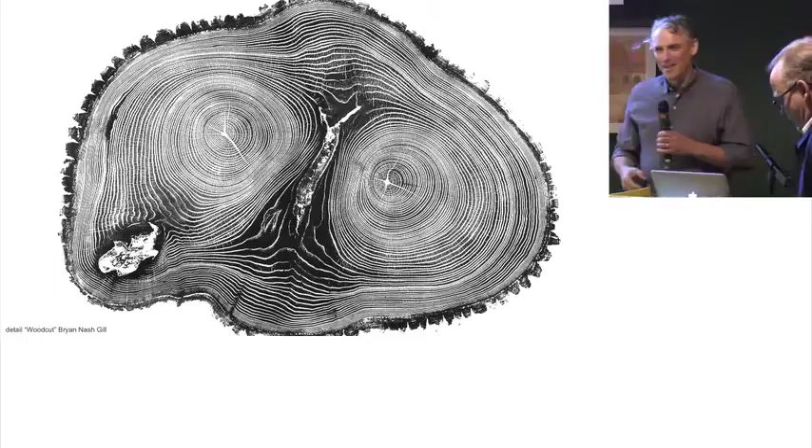Thank you, Pekka. I'm grateful to the Architecture Museum and to the friends that I know here and the new friends I hope to meet, and to Matti, who I've worked with now with Pekka at great length. If I'm either eating the microphone or holding it too far, somebody just wave at me. I'm not used to using 2 hands, I'm not ambidextrous.

I want to start with a bit of an epilogue, or prologue I should say, which is to show this print by Bryan Nash Gill. He did a beautiful series of woodblock prints of trees in a book which I recommend that you get. But the reason I show this is because it's a little bit of the chestnut of the wood lecturer, you know, you show a woodcut at the beginning of your lecture. Usually it's actually a picture of a tree, but this is actually an ink print of a literal tree. And what I like about that is that it's a bit dissociated, it takes away the romance of the tree as this living thing. It's analytical, and I do that with intention.

Because I want to talk about wood in this transcalar mode, which is to think about wood as a molecular, biochemical system, as a cellular system, and potentially as an urban system, and possibly a global system, but I'm really reaching at this point. So I'm going to be careful, and I hope you'll forgive me if I overreach.

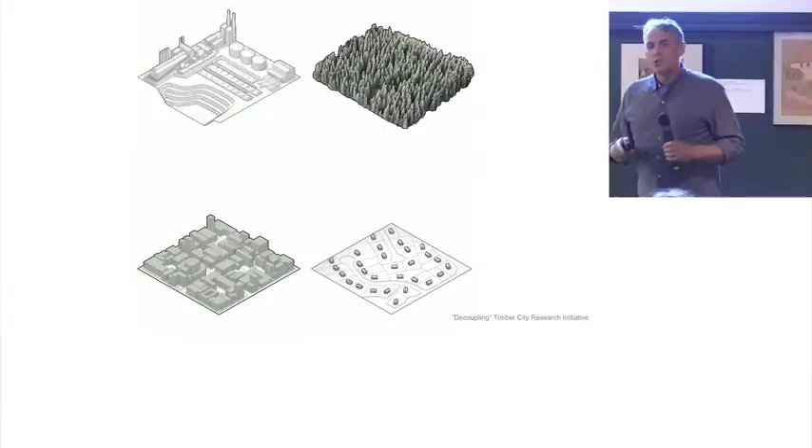What I'm interested in is the potential synergy between 2 landscapes which have previously been considered in conflict, the city and the forest. And the thing to remember is that forests hold carbon and cities emit carbon. So the question is: is there some way to game forest growth and sustainable harvest to produce cities made of wood? And moreover, to try to disconnect from a building, technological and industrial perspective, two landscapes which are linked.

The mineral extractive landscape, which produces steel and concrete, is linked to very efficient footprints, urban aggregations, urban building morphologies. And the forest, unfortunately, despite its incredible rich material range, is linked to a low-rise, low structural demand suburban morphology. So how do we break that?

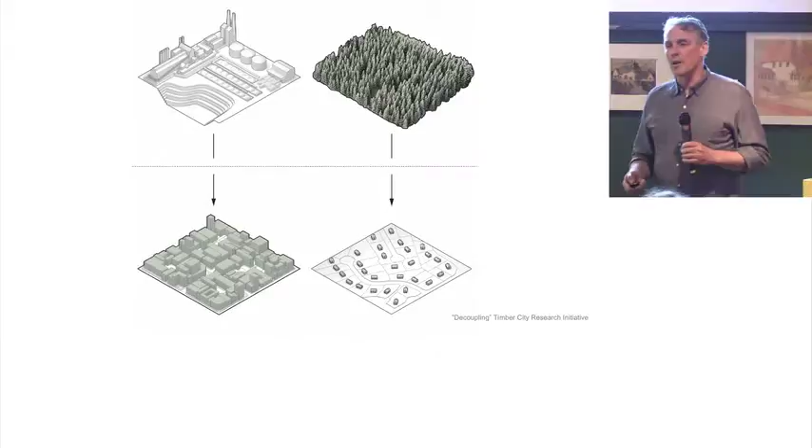What I'd like to propose is that we break it through regenerative architecture, and in particular a regionally regenerative architecture, which cuts down on potential transport costs, which uses the feedback mechanisms of people living in forests or near forests to know if they're being over-harvested, potentially deforested. We've lost that connection. We talked a lot about that today at the World Circular Economy Forum, how people aren't paying enough attention to their natural surroundings, or I guess disturbed natural surroundings, which is most of the world.

So the question today is, how do we move from this low-rise suburban morphology—which in America is suburbia, one of America's greatest and most durable exports around the world—we build suburban morphologies. How do we shift that material into new forms of building, which the Europeans adopted much earlier than Americans and Canadians, to produce high-density timber morphologies?

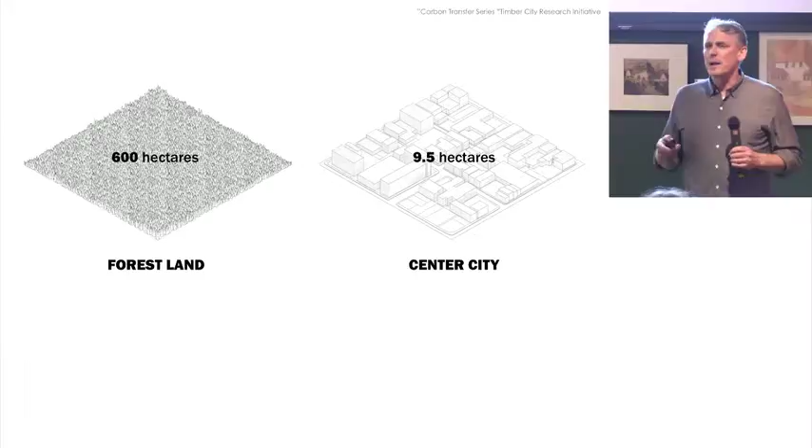I want to run through this because there are concerns about how much wood we have in the world, and whether we can actually build global cities with it and why we would do that. So we ran a scenario where we took a forest stand, planned a sustainable harvest, and planned to build out a 4-block district in New Haven, Connecticut, the city I live in. You'll notice the comparative carbon content.

We basically made 60 plots and cut 45, one a year, to build out the buildings based on the growth plan of the city. We also studied the stem succession regrowth of each plot, calculated how much material was needed, and found that the plots regrew—we left quite a bit in reserve.

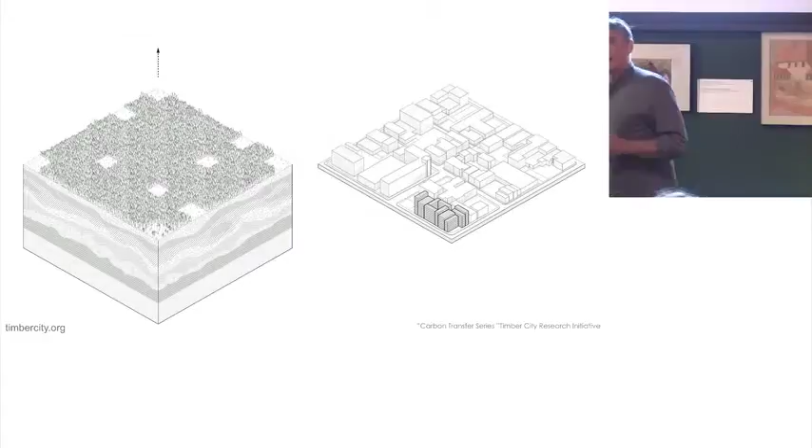We started calculating how much carbon was actually moved out of the city: how much was preserved in the forests we didn't cut, how much was reabsorbed through regrowth of the forests we did harvest, how much was sequestered in the buildings, and most importantly, how much was avoided by not building with steel and concrete, which would have been the conventional material for that neighborhood.

We ended up with a total carbon bank of about 282,000 tons of CO2, equivalent to about 64,000 annual emissions of vehicles. If you calculate the current value of a ton of carbon, it's probably worth several million dollars.

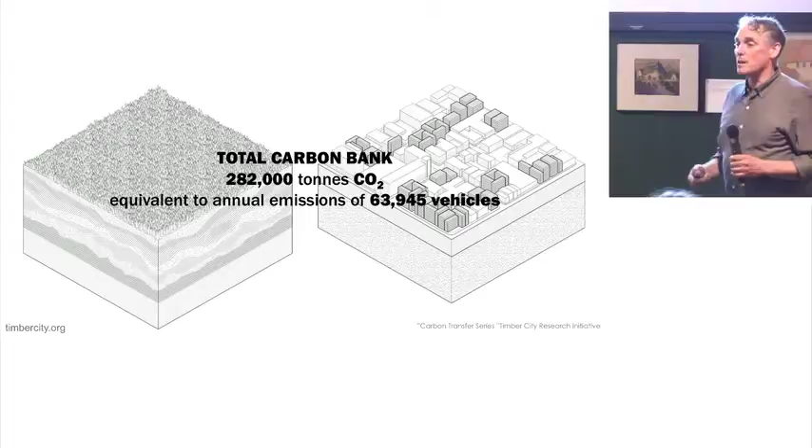If you listen to Bill Nordhaus, a Nobel economist who described the potential for a carbon taxation scheme, he feels that by 2100 a ton of carbon will be worth something like $1,000. I'm not going to do the math for you, but suddenly we start thinking about carbon as an economic currency, and that forest is a driver of that, incentivized to grow, be protected, restored, expanded, afforested. That was my long-winded way of starting my lecture, The Carbon Positive City.

Another piece of art, by a really interesting sculptor, James McNabb—he makes a lot of wood cabinetry, started collecting scraps from a scrap bin, and made a city, which he photographed. Art has something to tell us, I think, in this case: maybe we should be building cities with wood. Obviously we should protect our forests, but maybe we should consider the possibility that we could build with wood.

For those worried about global deforestation, consider that it may actually be a way to harvest silviculturally a lot of the forests that should be cut, while obviously protecting the very biodiverse, at-risk forests in certain parts of the southern hemisphere. In America, for example, in 1500 AD half the country was covered with forests. Today we've removed a bit of it, and we're down to 33%.

Right now US forests could sequester 11% of all emissions associated with anthropogenic activity. But with proper forest management, which includes use and harvest, we could sequester and absorb 30% of national greenhouse gas emissions. You might ask, where's the rest going if the forests can't absorb it? We have other forest pools, other carbon sinks and pools, and we'll talk about that in a minute.

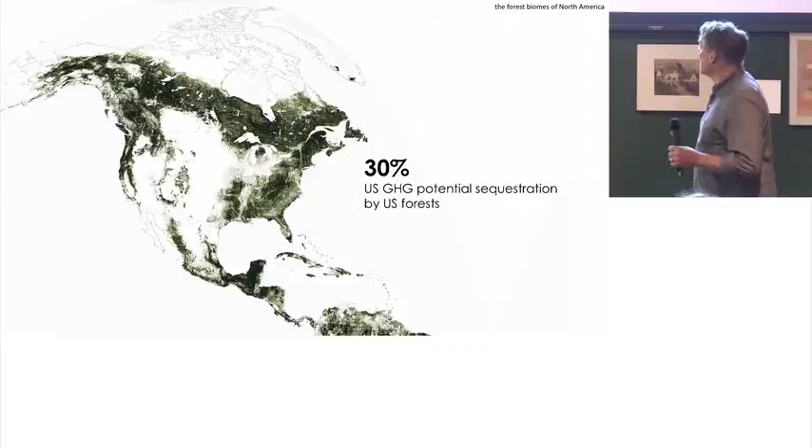But we should also start any discussion of the vast usage of timber for building global cities—which will expand inevitably—by talking about what the real forces of deforestation are today: agricultural conversion, since we eat a lot of meat and need lots of pasture land; mining for lots of metals, which we overuse, as we know from our circular economy friends at Finlandia Hall; and just building itself, which uses a lot of forest.

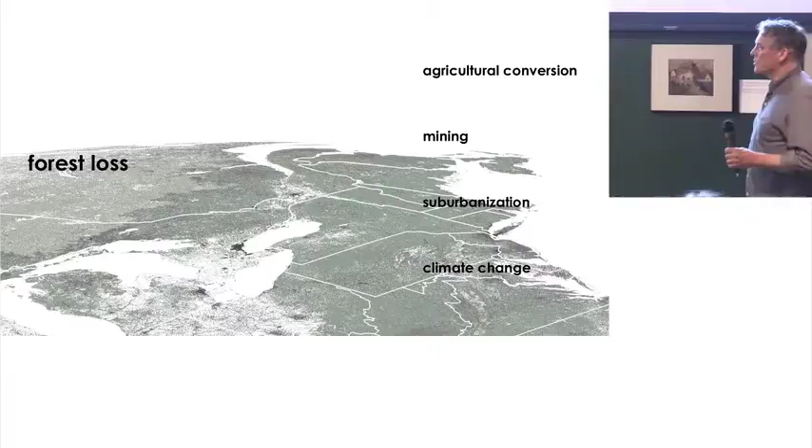And of course, climate change itself has wreaked havoc on American forests. You heard about the Camp Fire in California last year, which destroyed huge amounts of forest and released enormous amounts of carbon dioxide.

But this isn't really deforestation, because you can cut forests and they regrow. But this is what happens when you strip the soils, which have quite a bit of carbon in it. In fact, in temperate forests, about 50% of carbon in the forest is below ground. And so when you strip those valuable carbon-laden topsoils away, you get an irremediable landscape.

And we're running out of resources. We're talking about this at Finlandia Hall during the World Circular Economy Forum. We're spawning sand criminal syndicates that dredge illegally and collapse habitats in Southeast Asia to provide the demand for sand for concrete in India and China.

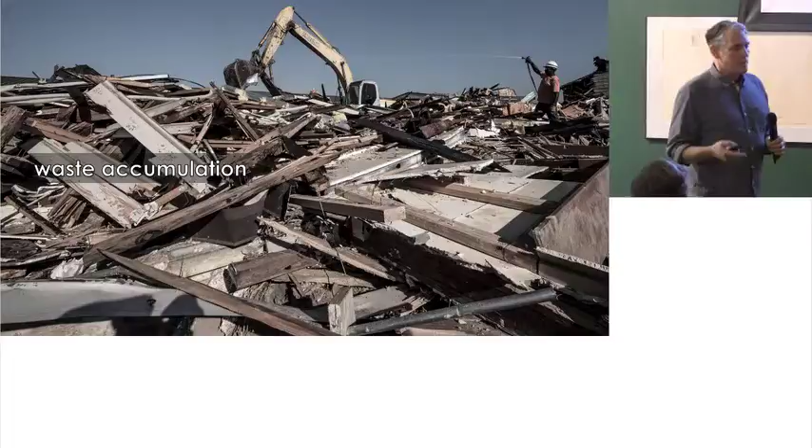And we accumulate waste, which is a problem in itself because a lot of it doesn't biodegrade, but we also remove valuable productive biomass by covering it with this, and we also cover it with other things, like cities. And we lose the value of those soils.

Not to mention that if we keep growing as a global population at the rate we are, we will need 3 times the land area if we choose to build in the same way that we're building now, at the same densities. So the question is, and I say this at the risk of possibly being mechanistic,

could forests be a geotechnology? Could we treat them as valuable tools that we can work to solve a climate crisis? So I'm going to interrupt myself.

A few years ago, more years than I care to remember, Pekka was very kind to invite me to speak at the Aalto Symposium 2012. And I titled my talk, Mistaken for Craft.

And it was a sort of self-critique, because I came out of the cabinet making world. I was a furniture maker and a cabinet maker, and I started a shop, and then I had middle-class guilt and went to graduate school in architecture.

When I got out of architecture school, for a lot of reasons, mostly a bad economy, I ended up going right back in and starting my shop again and doing cabinet work as a way of paying the bills. But I think it infected, or certainly inflected, the way I thought as a designer.

I loved wood and its properties, mechanical properties, bending elasticity, hygroscopicity, all of these interesting properties of wood, and we wanted to play with it, and we also loved tools and tooling and how you can manipulate wood with adhesives or steam bending or all these kinds of ways of gaming the properties of a cellular material.

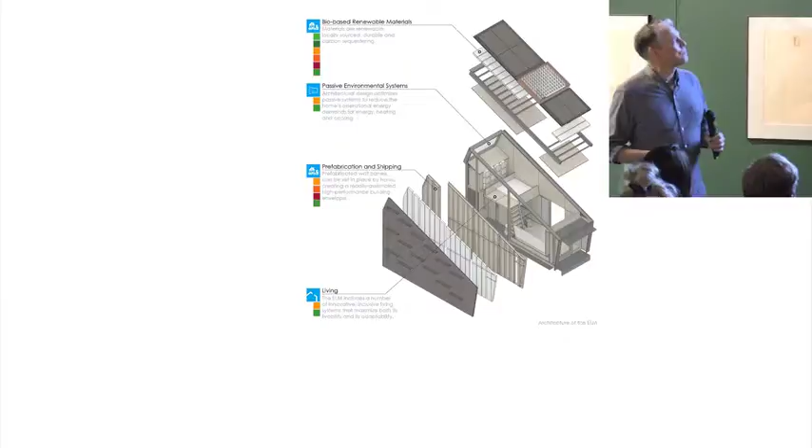We basically designed for about 4 or 5 weeks, and we built for another 3 weeks. We started, and in 3 days we moved it onto the UN Plaza. And I will never recover from that.

If you've ever imagined taking a house, admittedly a small one, through airport security, that's kind of what it was like. My daughter, who supplied us with food, almost got arrested by the UN police.

And we looked at the carbon sequestration or storage, which wasn't much—it's a small building, about 21 square meters. Really kind of one story with a loft.

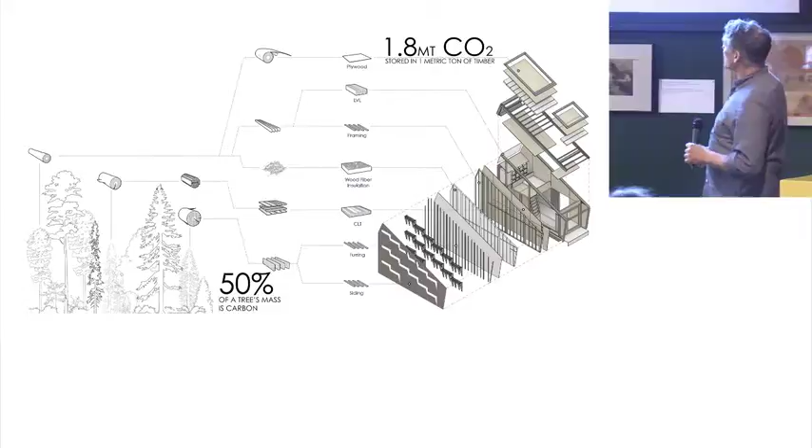We distributed the local material, and we looked at different systems: solar energy systems, solar generation, radiant thermal energy, indoor air purification, natural ventilation systems, potable water collection through condensation but also through rainwater harvesting, and finally a farming wall. It was surprising to get it there.

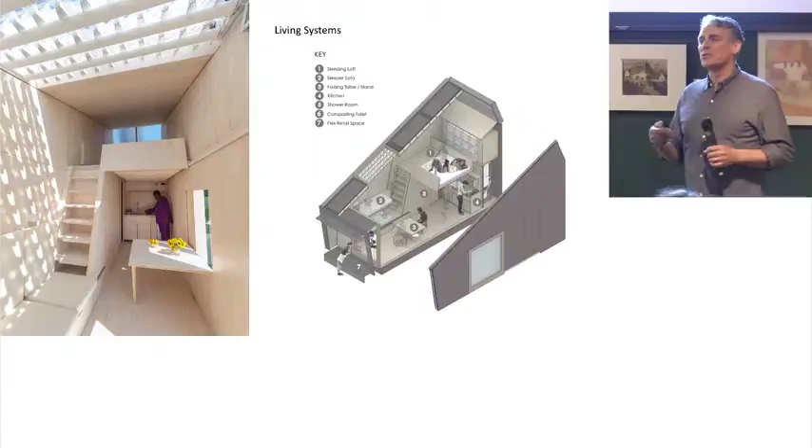I wouldn't say it's a work of craft, but it was an idea about working quickly with little time, trying to think on your feet, trying to make a decent building, a good home for somebody with a lot of options. Essentially, you can kind of see the layout, I hope, and I won't go into much detail.

This is the head of the Kenyan UN Environment Program, who spent a lot of time with us. He was great, and he actually said that he wanted to move in, which was nice.

We also studied the air quality, and it turns out that wood has really high air quality once the initial VOCs have basically diffused.

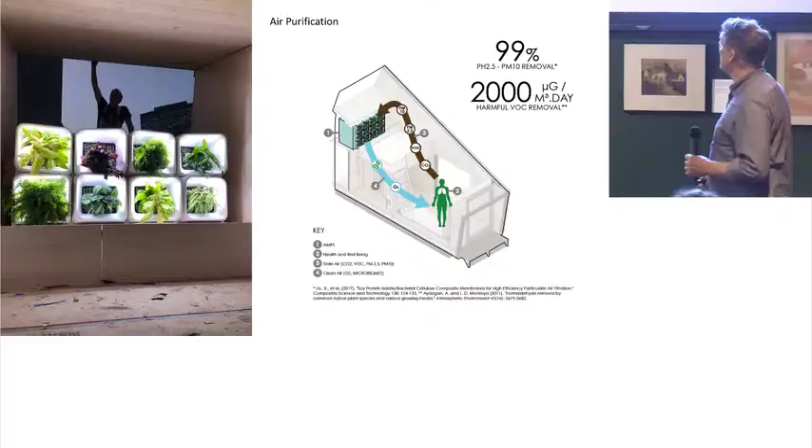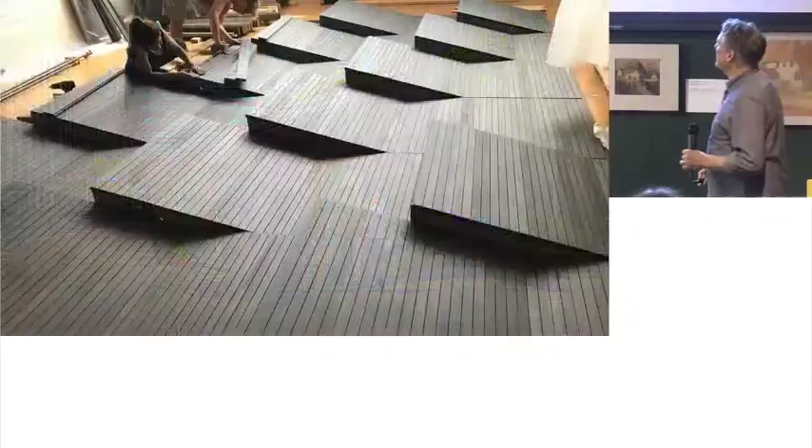We used a lot of reused materials to make the sidings, and ran out and had to get new material. It was a rush. We had a team of people in my office, students.

We worked with the Center for Ecosystems in Architecture to develop the systems, and we made the plant wall and grew plants in that for over 2 months, producing a pretty decent amount of nutrients.

It was a hit, because people in New York don't expect to find a house on the UN Plaza, and they liked it a lot. This is the Deputy Secretary of the UN tasting basil and eating tomatoes, not the green ones.

So it was a good lesson in thinking more broadly about how buildings should perform—both how they operate and how they protect people and provide them with services, but also how they should use materials from this increasingly resource-deprived planet.

And so we thought about scaling up. In scaling up, I like to think of a sort of design spirit guide, Charles and Ray Eames. My partner Lisa Gray and I have worked together since we got out of graduate school, and we wish we could collaborate like Charles and Ray Eames, the great furniture designers and filmmakers.

And I love this piece of art. It's a laminated double curvature sculpture, which I would love to have on my wall and own, but can't afford now. But when we add to the aesthetic program of this beautiful piece of sculpture, and we learn that it was a leg splint designed for injured soldiers in the Second World War, it changes our view of what that aesthetic is. It makes it more, for me, meaningful.

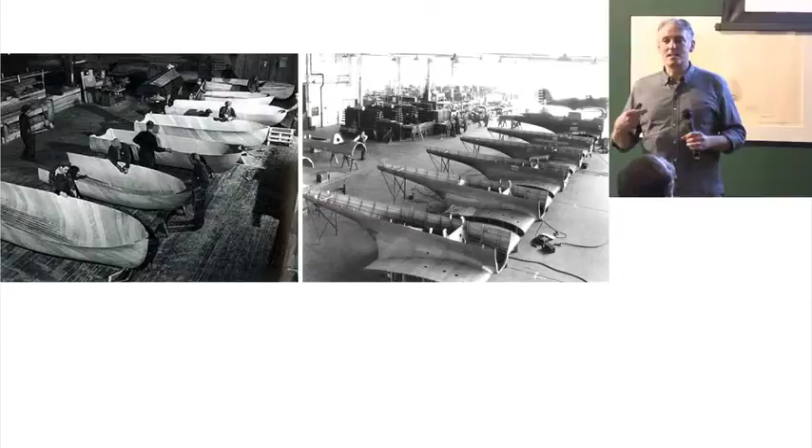What I really like is that the lesson the Eameses learned was something about scale, and they made this famous movie called Powers of 10, which I recommend you see, which is essentially zooming in and out of human habitation on the Earth. And then they carried it into their work, scaling from a leg splint to a chair to a fuselage for a plane or a boat hull. They understood that the beautiful thing about architectural design and material thinking is that it scales. It can scale, and you look for the lessons in the iterations of things that scale.

So we studied the idea of stiffness in a project we did in the late 90s, renovation of an old firehouse for an acoustical music studio. We bought a bunch of plywood and tried to see how far we could bend it in two directions. How stiff would it be?

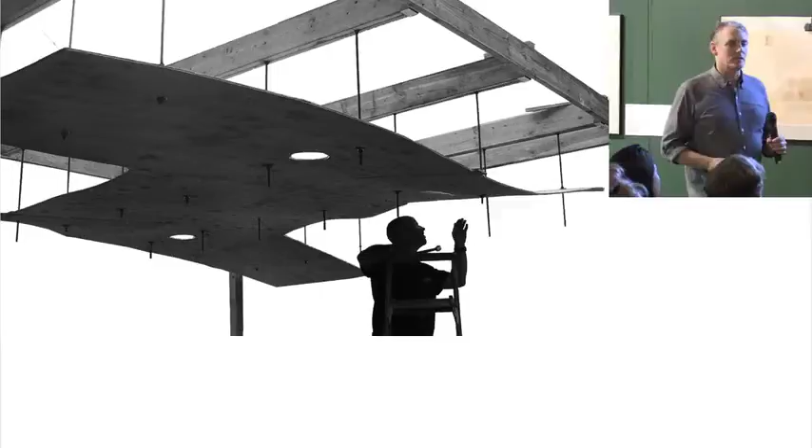And we created an acoustical shell, and we modeled it, physically testing it using different techniques of tuned wood mock-ups. We measured it and gave it to a Swiss acoustical engineer who promptly wrote back and said, I can't model this, it's too complex. So we essentially used these different threaded rod systems to produce an acoustical shell that was acoustically dead for a recording studio and very live for performance, and that was a kind of complex design process.

We designed an acoustical diffuser at the stage to produce these sort of vanes which twisted and warped to diffuse sound for the musicians, and also to serve as an air return duct. We stole a little detail from one of Charles and Ray Eames' furniture patterns, a relieving cut where we cut a circle out of the end of a kerf cut, a saw cut, because we found that when we were warping that, it split. But when we could expand the tensile area around a larger surface area, it wouldn't split. And that became a kind of motif.

And the room seats about 70 people, and a crush, and you can hear the piano. It's incredible how live, how rich wood is, and we know it's a great instrument material. Here was a big room that was an instrument. You can hear the hammers on the piano coming down before it hits the string.

And it's so incredible. We were renovating this firehouse, which had been abandoned, and we were able to, through the brilliance of our client, Nick Lloyd, who runs a record label there, produce essentially a home for himself and his wife, who's a painter, and then their children, plus a bar in the basement, the recording studio, and the record label. Visiting musicians started coming, and it was really successful because of his vision. He lived in this amazing sort of relic of 19th century New Haven industrial space.

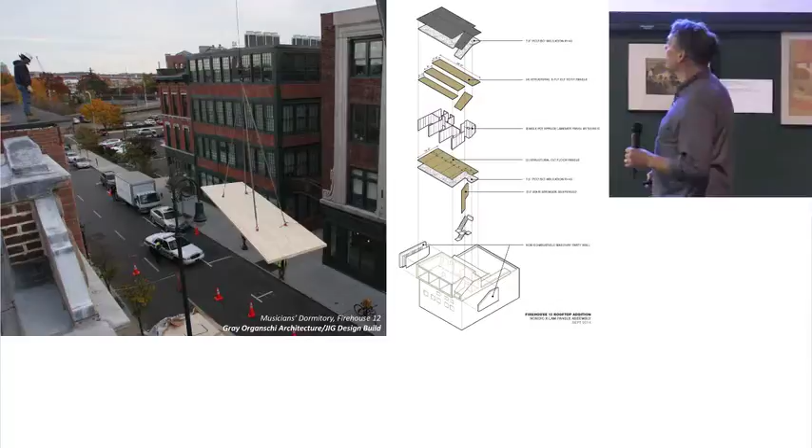And we quickly found out that the building couldn't support that, because it was an unreinforced masonry building. So we chose to use mass timber, cross-laminated timber and glulam, to stiffen the building with a light structural material that would essentially keep the building up under the load it held. So we have a stairway up into a hallway with a little seating area for musicians to play, a couple of 3 bedrooms, a little bathroom, and a WC.

And it's sort of created this new urban lawn on the roofs, and it's created more density. And what was the real discovery was we could plop this building down on top of an unreinforced brick building from 100 years earlier.

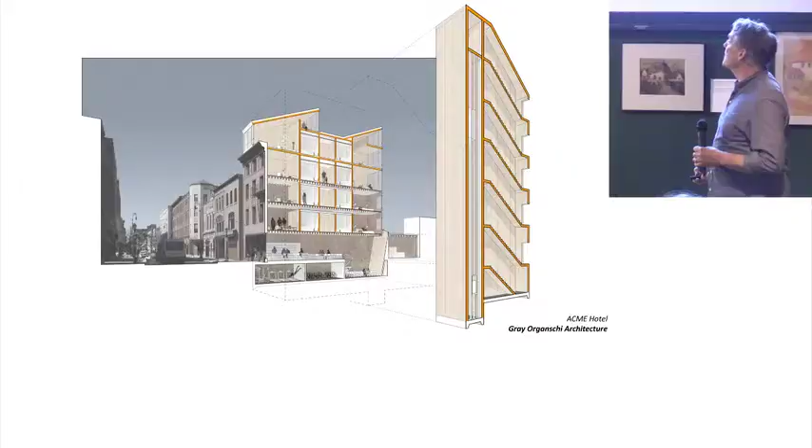So a developer contacted us and said, I want to add 2 stories to the other building next door. And we designed a restraining system using cross-laminated timber cores to produce a hotel 2 buildings down. Then another developer called us and we designed another building, and suddenly the city economic development coordinator was saying, oh my God, we can actually get more density in our city using wood because we can't do it with steel, it's too heavy, or concrete. So this is a great model and we'd like to pursue it.

And that brought us to a kind of idea about this notion of structural biomass. Why aren't we using this great plant material that's so abundant and so photosynthetically productive? It provides so many ecosystem services. Why aren't we using it for our buildings? Because we know that it will regrow, it will regenerate. We've been talking about renewable materials for 60 years.

And so we began to study different scales of using just round wood to produce structure. That was a school. We worked to produce this apostolic community center for some Jesuit priests who said they wanted to be stewards of the environment and they wanted to follow their vows of poverty and celibacy.

And that reminds me of a kind of funny story. We were having dinner with the rector, and we had a really nice bottle of wine while we were talking about the design. And another visitor who was a layperson, after this sumptuous meal, said, man, if you guys do celibacy like you do poverty, sign me up.

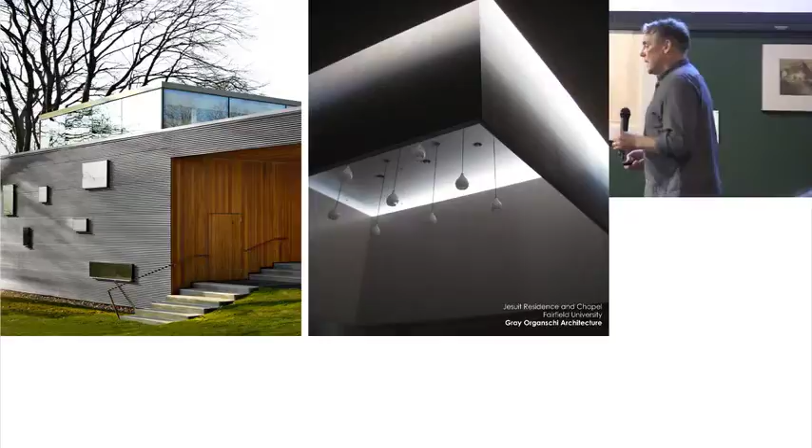Anyway, the building is a lot of wood. We designed it as a wood structure. The university that sponsored the building decided that it wanted to do a LEED platinum building, and we learned that you get more credits for recycled steel, despite the enormous smelting energies that go into steel recycling, than you do for a wood structure, because wood was essentially politically knocked out of LEED for quite a while. Recently it's been reintegrated through a material credit.

And so we made a steel building and we used as much wood as we could, but what we found was that the university had essentially, through bad planning and soil management, killed a few enormous American beech trees, which they were going to cut down and chip, and we decided to turn it into components of the chapel, because the Jesuits were talking about poverty.

So we wanted to deal with this issue of scarcity through the wood, and we studied all the different kinds of flaws that exist in lumber and embraced them. Creating screens, privacy screens for the chapel and for the men between the public spaces and the more sacred spaces, and the altar and the ambo and the crucifix and the baptistry, baptismal font.

And the idea was to embrace all of the material coming out of the forest, not just the superfine, sort of rock star trees that everyone wants in their beautiful cabinets in Manhattan, in their kitchens and bathrooms, but to try to understand how we might use solid wood with flaw, with spalting and rot, and consolidate it into a meaningful piece of furniture.

But the thing that really gets us excited is the technology of contemporary wood engineering and glue. And when we saw this, I showed this in 2012 at the Aalto Symposium, when we saw this famous experiment, which Juhani Pallasmaa called the man-made tree. We saw it as a sort of repository of lots of adhesives, lots of technically interesting adhesive.

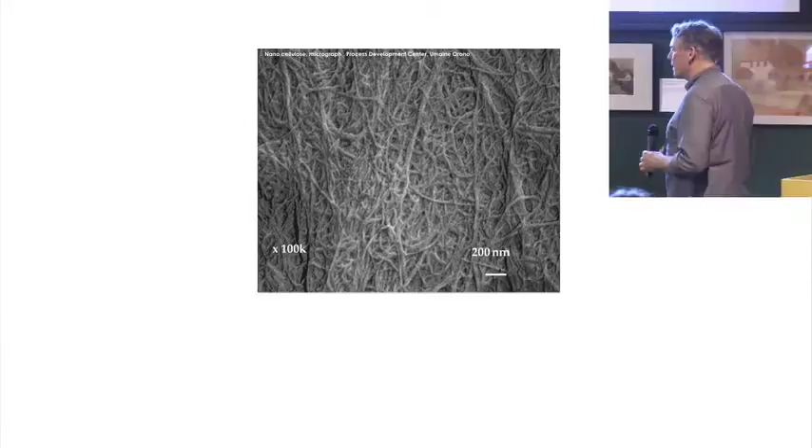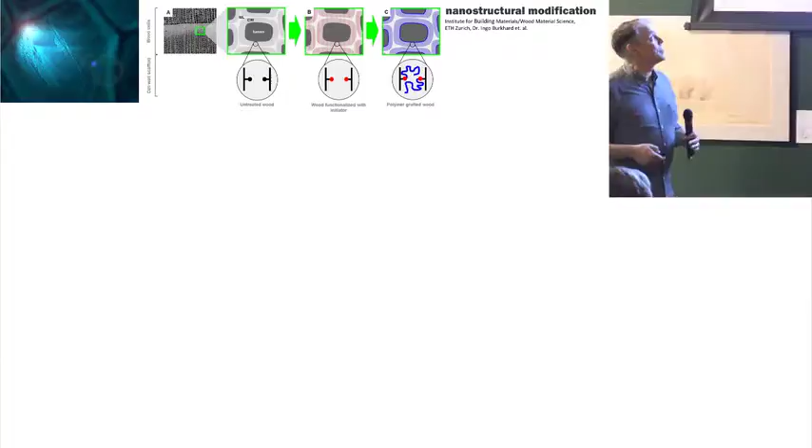And we went to work thinking about all of the different things that are going on around the world, inventions, the sort of revolution in bio-based materials, biogenic materials, which is happening right here in Helsinki at VTT, or across the Atlantic at the University of Maine in Orono, which found a way to mechanically produce nanocellulose and are pressing panels out of it, or the work by the folks at the ETH in Zurich on cellular nanostructural modification of cell walls using polymers and mineralization to create greater rot resistance and fire resistance and all these kinds of exciting things, and these different techniques of adhering wood. We're even starting to look at lignin-based glue so that we're not actually using fossil hydrocarbons to make glue.

And then Achim Menges' work at the Institute for Computational Design, where he's looking at the natural hygroscopicity, the water-loving character of wood, and how it can change to produce apertures depending on activation by moisture changes.

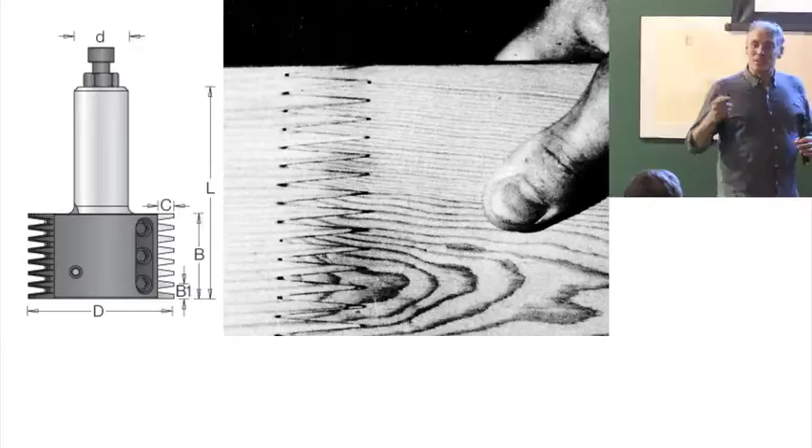But I like the dumb stuff. I like the stuff that's ready at hand that we're making. We've been making glulam beams for a century. We've been making CLT for 25 years. Petra, you can correct me on that, but it's been decades we've been doing this stuff. And really the tool is a finger joiner to make long sticks and glue to laminate the sticks together.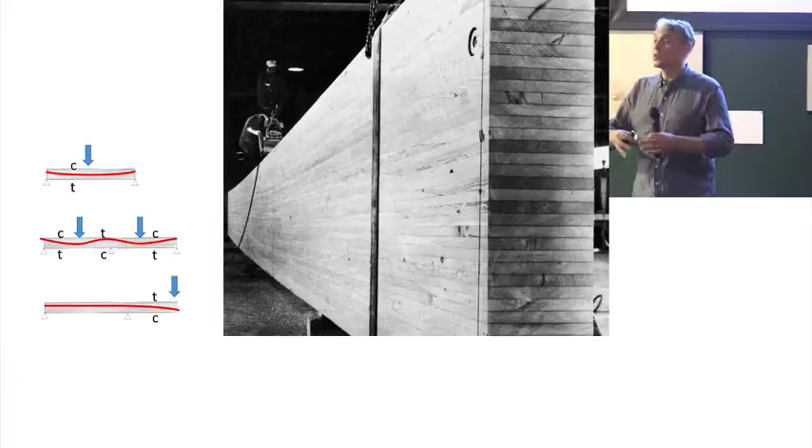To produce massive members with enormous capacity. And now we're only realizing that we can use them the way we used heavy timber industrially in the 19th century. It's fire resistive. And it already knows how to manipulate the different quality of fiber that comes out of the forest, putting the best stuff along the structurally most demanding edges, the tension edge, the second best stuff along the compression edge in a beam, and then you can load the cheaper stuff in the middle.

Which means you're using more of the forest that you cut. And I think we haven't yet fully understood all of the potential of that capacity that we've been using for years, creating different kinds of structural configurations.

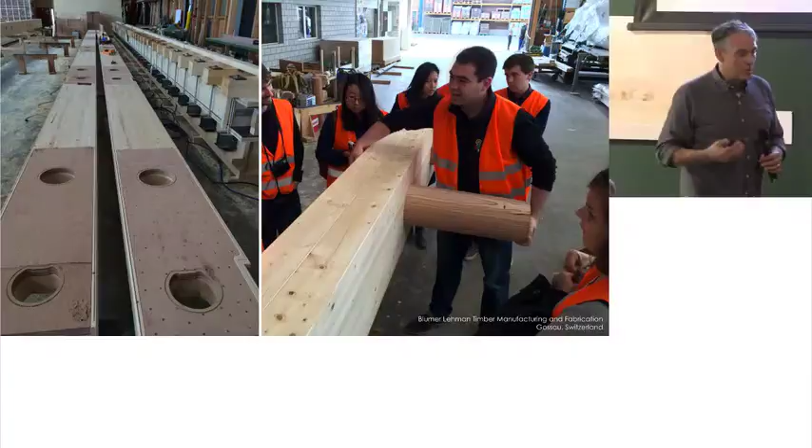This is an example at Blumer Lehman in Switzerland, a 5-story building where the architects and the manufacturing company recognized they were using a lot of spruce, which is a wonderful structural wood, but there's a lot of beech growing in European forests, so how could they use beech? They made laminated veneer lumber, bearing plates, and laminated veneer beech dowels to produce a 5-story building that had no steel.

And so we started making lots of buildings out of curvy glulams because we liked the shapes, and we made houses out of it, and I think our clients tolerated it. And we misunderstood certain kinds of things aesthetically because we liked the shape of this beam lying on the ground before it was put up.

And so we made a bridge out of it and sort of gained the capacity of the manufacturer to produce a construction bridge that is a 10-ton, US ton capacity bridge, which we watched a 30-ton truck drive over, which was very interesting. But what happened was it sprung back into shape, and we thought, oh, wood actually is resilient structurally.

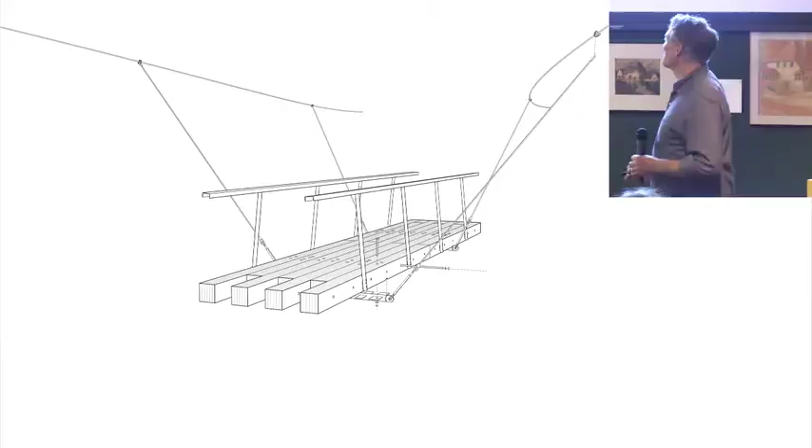And so we made a number of bridges, and I'll move through this quickly. It's a kind of passion of ours. We get asked to make bridges because people think wood bridges should be in woods. It's the correlation that people seem to like. And we really worked with our partners as glue laminators to produce essentially treated bridge systems.

And we made our first suspension bridge a few years ago, and it was a challenge. Our company, Jig Design Build, rigged it. We have one of the builders here in the audience. But we got it straightened out, and we made this bridge named after Henry David Thoreau, one of the pioneer environmentalists in the US. And people use it, and they love it.

I think they love it because it's not made of plastic like a number of the other bridges up and down the river. And it's made of solid, thick material, which because there are not a lot of little joints, it's more resilient. It lasts longer, it's more durable. So mass timber has a lot of possibilities.

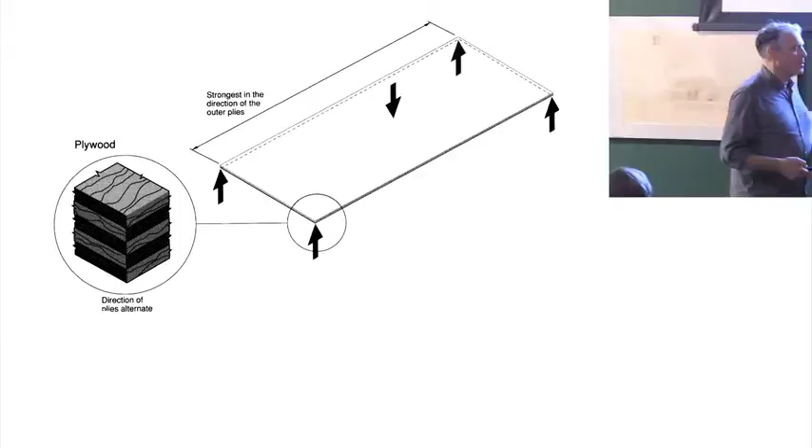And then, you know, the CLT revolution comes along, and the Americans figured it out, like 18 months ago, it feels like. Meanwhile, Stora Enso and KLH and a lot of European manufacturers have perfected it and can still beat the pricing of American CLT manufacturers. They just stole the idea of plywood, transverse lamination, and produced it with sticks, as you all know. And you can produce all kinds of fascinating configurations.

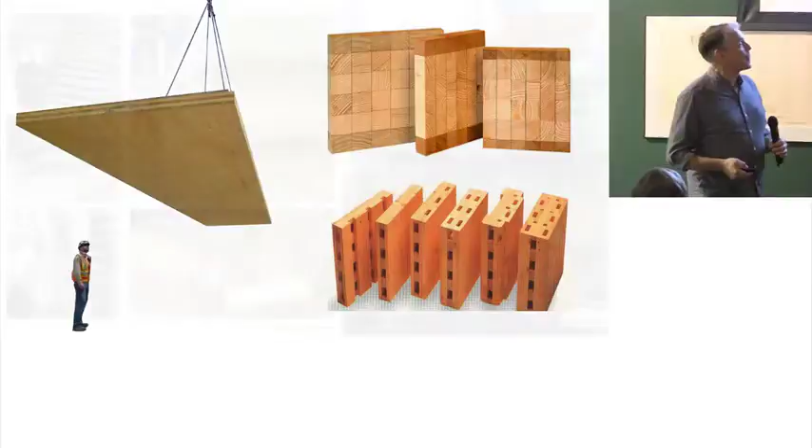These slides are so outdated now, given what's available. I need to get on the stick and find some new pictures. But we're starting to build bigger buildings. This is the Arbora building by Nordic Structures in Montreal, 7 stories over a podium, 500,000 square feet, produced incredibly quickly.

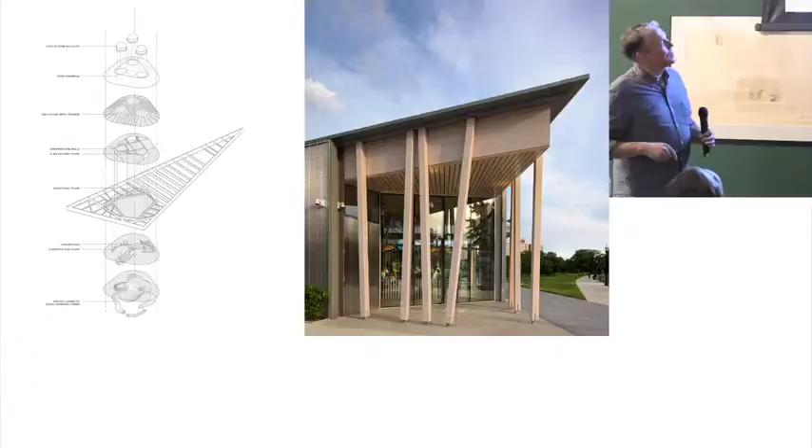Meanwhile, we were building in the city these little tiny bespoke community buildings, a merry-go-round building made out of just posts that canted to create structural lateral resistance. We gave the engineers a nice thick roof structure so that they could use timber, and they made it out of steel anyway, because that's one of the issues.

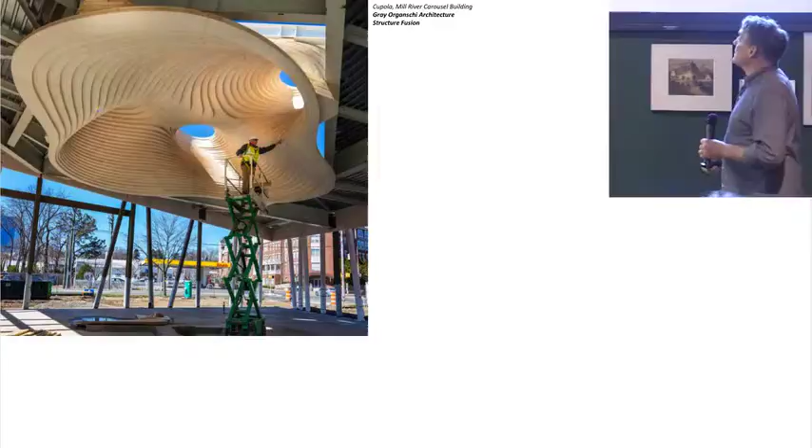We had a great fabricator in Quebec who worked with some Belgian, Austrian, and French fabricators to produce this cupola made out of a kind of topography of cross-laminated timber, which had 3 skylights and sort of spun and rotated in the opposite direction of the merry-go-round. It's the kind of thing that shows you that wood, because of the manufacturing capacities it allows, is so amenable to digital kinds of fabrication that it's easy to build something like that in a factory, off-site, ship it.

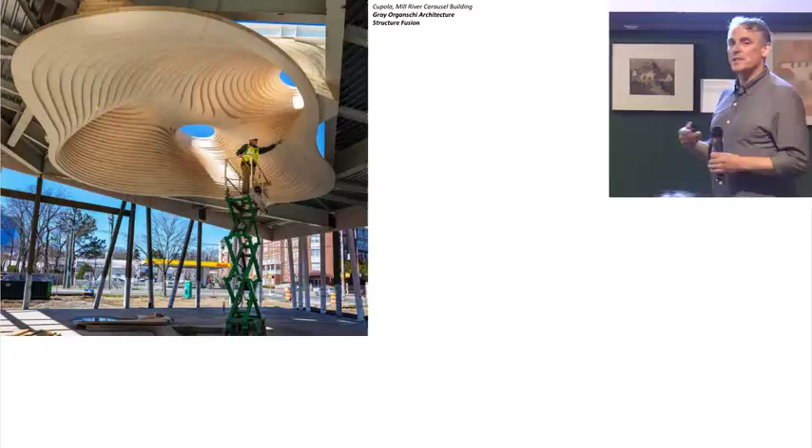It was a fabrication project done in a factory but assembled by steel riggers, because the company, Can-Am, which is the largest steel manufacturer in North America, has bought a timber fabrication company as a kind of climate change scenario, because they know wood is going to be the thing of the future, and they know their guys know how to lift really big pieces of material high in the air with cranes. So we built this, and it took a long time to convince anyone in the city of Stamford, Connecticut, a city of about 200,000 in the greater metro area, to build this for the kids. It's a public merry-go-round. It costs 25 cents to ride, and they ride around, and I look up and get a little seasick, but the kids seem to like it.

So here we are. We've been experimenting with making wood in the city in kind of little stabs. Meanwhile, our friends in Vancouver and Austria are building multi-story, huge buildings out of timber, and we're playing around with one-story event spaces. But what was interesting to us, as we watched the proliferation of wood architecture, was the sort of molecular aspect of wood.

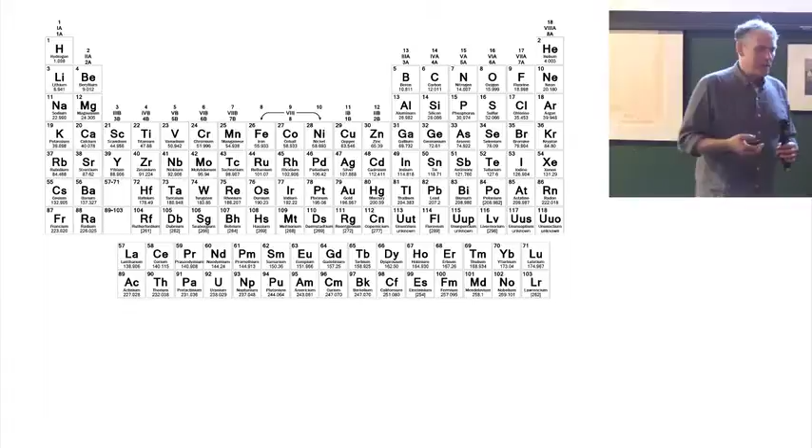It's made of carbon. Half of it is carbon. It's a carbohydrate, like spaghetti. And carbon is an interesting element. It's the 15th most prevalent element in the world, and the 4th most prevalent in the universe. It's called king carbon because it produces an array of different kinds of polymers at Earth's temperatures and pressures. So it's abundant, hyperabundant. And when it's hard and transparent like diamond, in its allotrope of diamond, or soft and dense like graphite, you know it exists everywhere in many kinds of conditions.

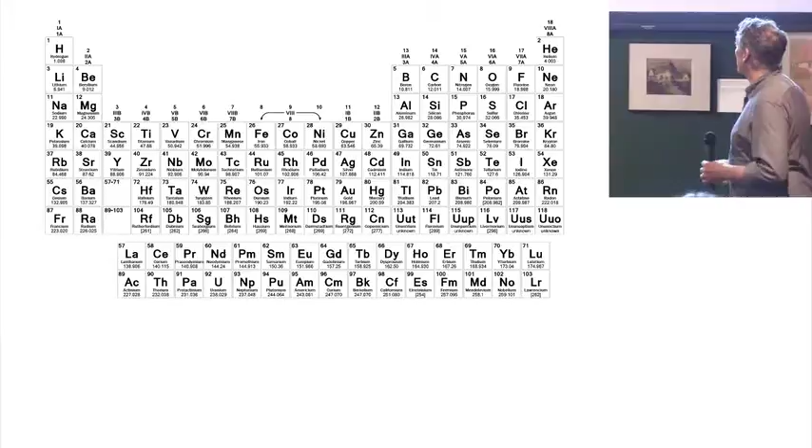A colleague of mine, an industrial ecologist at Yale, Tom Graedel, who's one of the early thinkers about life cycle assessment and material flow analysis for industry, likes to hold up his cell phone and say that nearly all of the elements in the periodic table are in this cell phone, short of the radioactive ones, which is daunting to think about, given that most of the buildings we make today are much more sophisticated than our cell phones. They have much more material, a much wider range of material. And if you think about the throwaway culture of cell phones and apply it to building, it gets a little scary.

We've seen, since the Industrial Revolution, a sudden spike in carbon concentration. And not surprisingly, if you also map global population against carbon concentration, you'll see that it's coupled. That's the thing people in the industrial ecology and environmental world are worried about, because that means when we consume as a species, we produce — not just because we breathe, but because we make a lot of stuff, we're makers, homo faber, we emit carbon. And that correlation is very strong.

And if you think about it globally, we know that over history, if you think of this as a timeline of the forest landscape, the biomass landscape that suddenly turns into the tall building, the Burj Khalifa is there. I learned from one of the engineers on the Burj Khalifa that when they pumped the concrete in the desert heat up to the upper floors through a pump line, they had to actually jacket the pump with ice water because the concrete would overheat and cure.

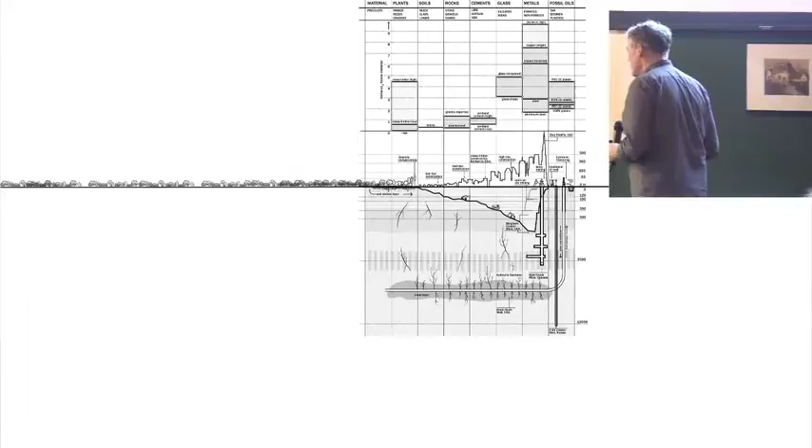And I think when you are making a building in which you have to ice your concrete, I think we're in a very serious societal problem, economic, political problem. And in doing so, we've actually dug down through that precious layer of bio-rich soil to create a kind of hole for ourselves.

And then these are all the different material classes. We start with wood and we move all the way down to the fossil hydrocarbons that fuel manufacture. And we learn basically that we have dug ourselves into a deep hole, existential, environmental, global. In fact, it's been noted by many scientists that human beings have now disturbed every geobiological, geochemical, and geophysical system short of the tides.

And it's a sort of conceptual model, but basically what we're saying is you get more environmentalism, less carbon footprint for the spans that you get out of mass timber, which should be an economic incentive for anybody. And if you just remember that basically half a metric ton of carbon dioxide is stored in a metric ton of mass timber, or choose your unit, we can start thinking about how wood, as well as carbon, can be a bit of a currency.

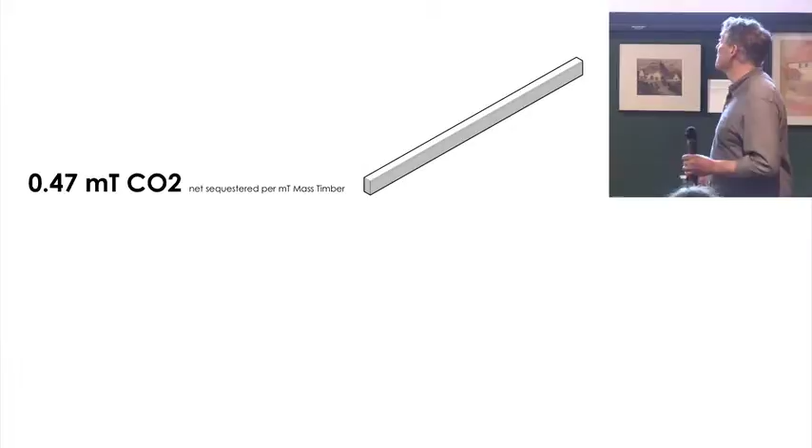And so I want to tell a story, which Matti will be commenting on soon, about a school that we made. It was a farm school in New Haven, Connecticut, serving inner city kids who have very little access to farms or nature, and they study ecology and agriculture. And they asked us to build a building for them on this site, a former farm site.

Their classrooms were here in this old building. There were their farm fields. Basically, it was a dump that had been excavated out of a mountainside, and so there were lots of drainage problems. And they asked us to build an ecological building.

And so we designed a classroom building which had a gym. They could only afford a half gym, art classrooms, 2 science classrooms, offices, and that it would create a new space of entry for the school because they were parked on a hillside. And so we used the building to navigate that sectional change.

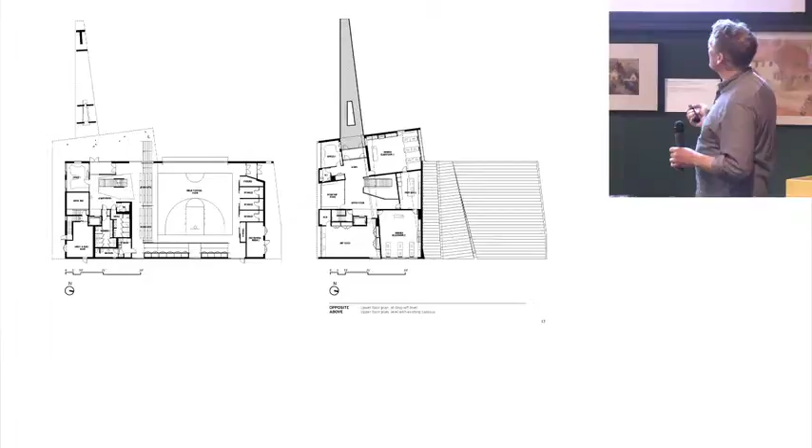It's fairly simple, I won't go into too much detail, but just to give you a little reference, the building has this half basketball court, which also serves as a gymnasium, a rec space, and a theater. And then most of the offices and bathrooms are downstairs, and upstairs are classrooms, which each look into different areas. And we decided that we're going to throw everything at this building.

The roof was going to become a really important element in the building. It was going to allow natural daylight to reduce electrical illumination costs. It was going to be super, super insulated and airtight so that we could optimize our thermal performance. We aligned it on the south. The roof pitches optimize the angle for solar photovoltaic arrays, which would power the geothermal pumps that ran the school.

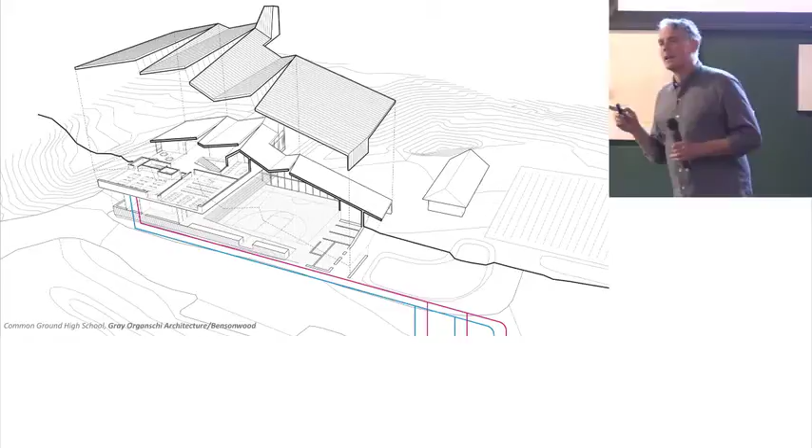I mean, it's really hard. American school systems are a wreck. So the idea that a public charter school could get the bond issued to produce the school was a big deal, and it was really a tribute to the administrative team. They were incredible, and we've got all this stuff in there, and we developed bioremediation pools and artificial wetlands, which became outdoor classrooms.

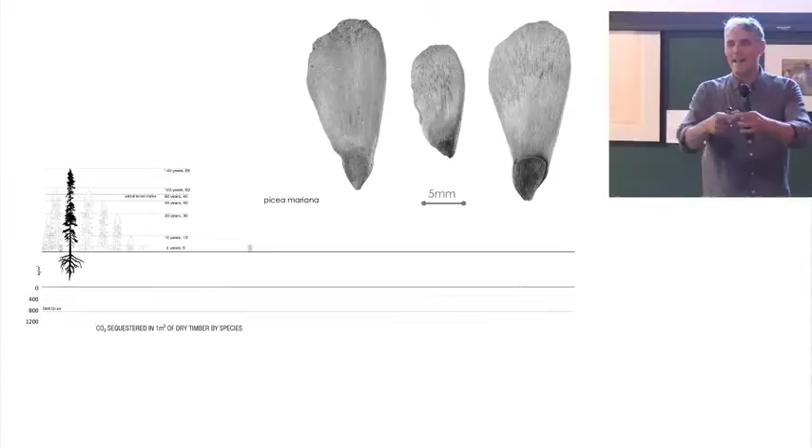But we argued that the thing that would be the most beneficial was to use regionally harvested wood to build the building and to use it as densely as possible, and to use these new technologies that would allow the structure to be the finish as well as the structure, so we wouldn't have to cover it up. And so we looked at black spruce from Canada, not too far away from us, about 580 miles, and a manufacturing company that was using this black spruce that grows in little thin strips, 8 inches in diameter maximum, very tiny. No one in their right mind would harvest a piece of wood like that.

That's where they work, and they figured out really wonderful lamination systems. We studied how long it would take to optimize growth, how to optimize carbon sequestration in the forest, and when we should harvest it.

We tracked how much carbon would be stored for all the species that went into the building, then transferred that material conceptually through all the different products we were using, from finishes to structural components, into the building, tracking exactly how much carbon would go in and through the forest. So this is what we are calling the carbon transect.

We measure off that line. This is the stored carbon, this is the emitted carbon during production and transport, and this is the carbon that gets stored through the body of the building. So we learned we get to store quite a bit of carbon.

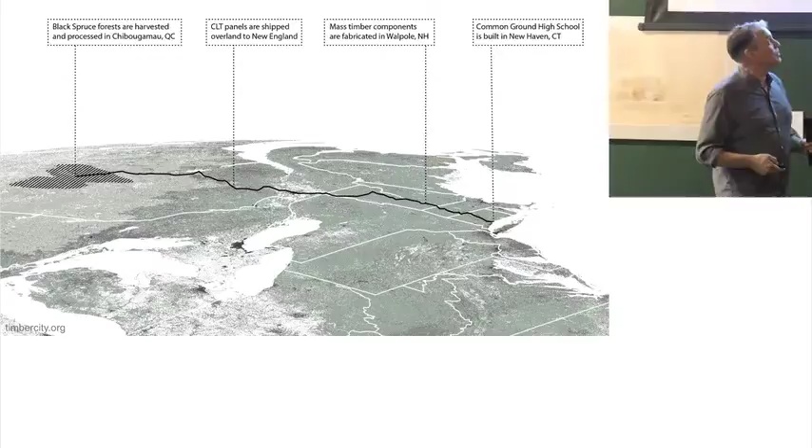We took into account that the material was manufactured in Quebec, produced in Walpole, New Hampshire, and then shipped to New Haven. This is the story of the construction: five guys and a crane. The whole assembly was put together in two weeks.

Then the sidings went on, and we learned there's a whole way of getting more advantage, optimizing more the prefabrication, which we would do next time.

The building now functions for 220 high school students and 15,000 New Haven residents every year through different kinds of programs, camp and farming programs. And the building is made out of wood.

This is a glue-laminated bridge which replaces what would have been a concrete egress stair. We have a little bit of steel in there because wood can't do what architects like to make very thin, wood might not be able to do that.

The building is lined with cross-laminated timber. It's really an industrial product. As if there were an exposed brick wall, we would love it, right? But wood structure, people don't think about so much.

These are just big plates of wood that reflect light beautifully, treated very cheaply for this rather resource-deprived school. All the public circulation spaces are made out of wood, cellulose fiber, and there's some concrete in here too. We'll be talking about that.

When we finished the school and wandered around, the kids were talking about all the ecological principles that went into it. We would ask them, what do you like most about the school? Hoping they would say, oh, the daylight is beautiful, oh we love the shapes, the roof shape is so cool. To a one, they said they thought the building smelled good.

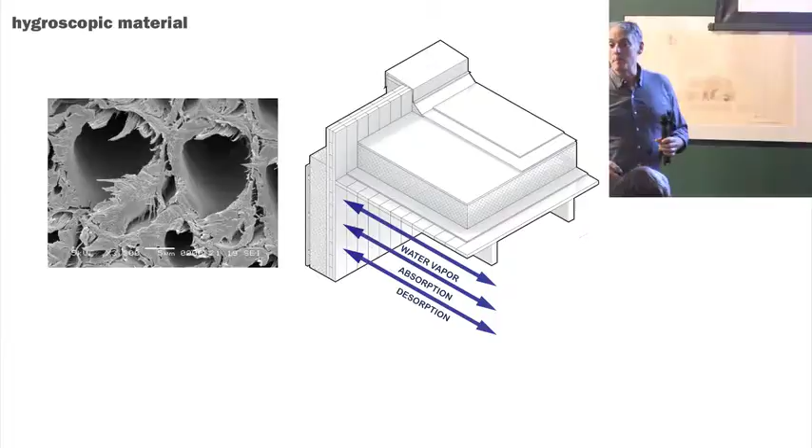We've also learned that with this property comes a phase change from vapor to liquid in the cells of wood, which may have energy implications, so-called hygrothermal mass, just being studied here at Aalto University and other places like the Norwegian University of Science and Technology. Christina Nora is a colleague.

But basically it's just a building, right? It's a building that could be built out of wood easily, it's not a big deal. It happened to be one of the first buildings in the US to use cross-laminated timber, but it's otherwise just a nice place. We're proud of it.

The kids seem to like it, the teachers like it. They celebrate graduation inside that room unless it's really sunny, and then that's where the speaker stands, but there's a kid playing basketball. And it's a farm school.

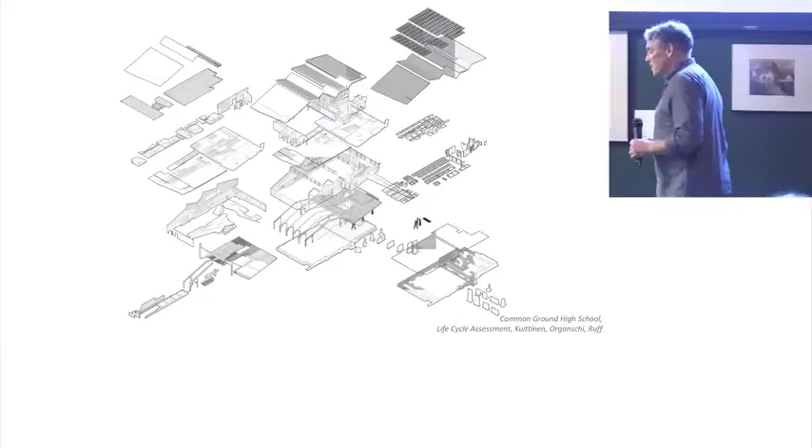What we decided to do, with the help of Matti Kuittinen, was essentially conceptually take the building apart to try to understand what its impacts really are. Through this carbon book project that Matti and Pekka and a colleague of mine in the US are working on, we started studying the actual impacts of the building.

We looked at what elements specifically were emitting carbon, and Matti will talk more about this with much more insight than I can offer. As you'd expect, metal elements require a lot of heat for formation. Site and groundworks can disturb a lot of soil, and we pave things, so we lose carbon that way. Concrete foundations are a big producer of emissions.

But if you look at storage, now it shows a different picture. These offsets start to become really valuable because the wood material, and also the plantings and the new very productive soils that we tried to protect with the farmland and with the wetlands, can actually store carbon.

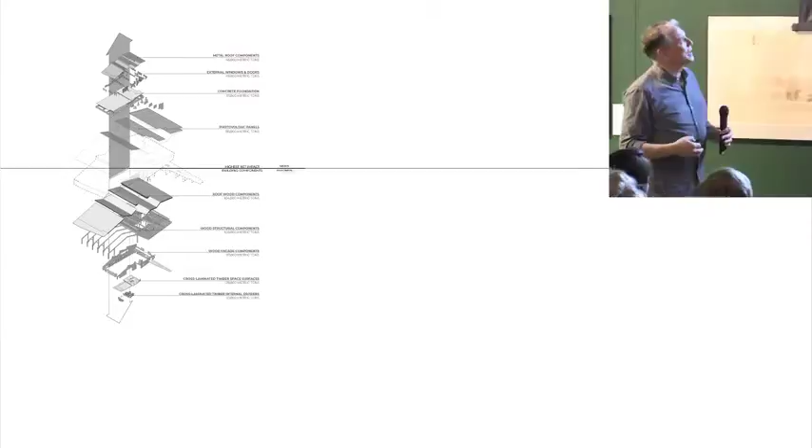So we made this monstrous drawing, which shows everything below the line stores carbon, everything above the line emits carbon, and if it's bigger, it stores more carbon. It's one of those useless drawings that architects like to make, but I like it a lot. It's a way of saying there's a monstrous condition happening, which is that we can store and emit carbon at our will, and that at our will is a really important part of this discussion.

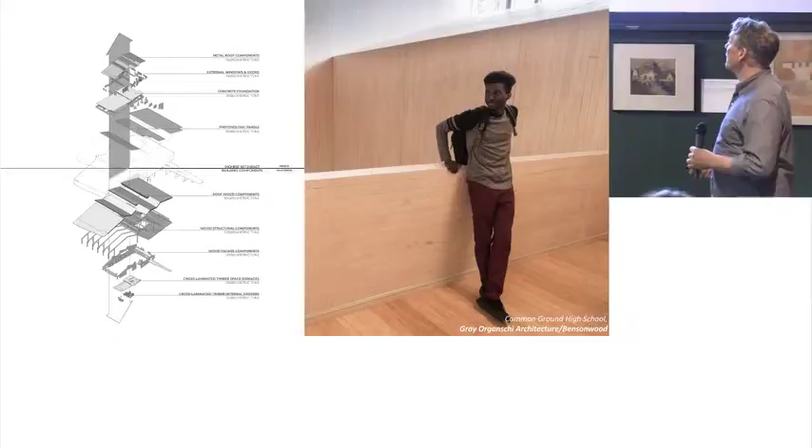This young guy worked on a study with us. He took our building information model, we taught him how to do it, and he quantified all the material. He counted up all the weight of the wood in the building and learned there was 450 metric tons of carbon dioxide stored in it, worth 100 cars' annual emissions—a great project-based educational opportunity for kids. I think he's going to be a major scientist.

This guy was amazing. That brings me to the end of what I want to talk about, this idea of bioeconomic building scaled up to some of the themes we discussed. I quote Lionel Robbins, founder of the London School of Economics, who defined economics as a science which studies human behavior as a relationship between ends and scarce means and alternative uses. That's what we're talking about today as a planet.

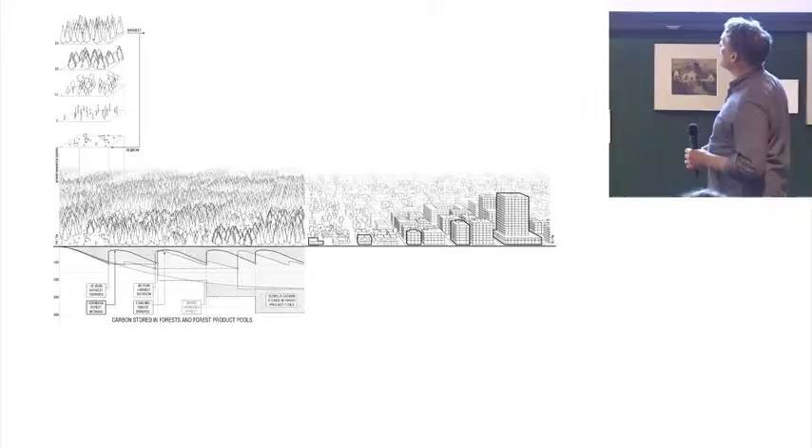So we took our common ground model and started studying exactly how much carbon we could store, how often we could replenish a harvested forest cut, and how to move those forests of different species through commercial products available right now into buildings. We looked at suburbs, more suburban structural morphologies and assemblies, and then we looked at high mid-rise buildings.

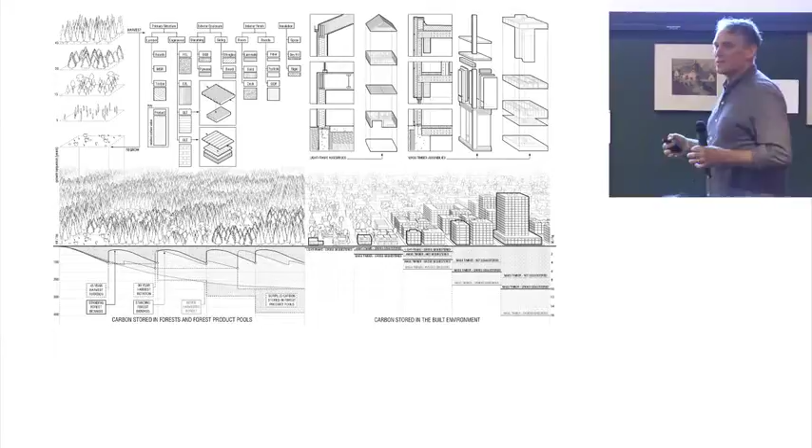Remember my carbon transect—below this line are the storages. This upper line reflects the cyclical growth and death of forest fiber, which emits carbon. Whenever it jogs back up, it's emitting carbon because it's rotting aerobically, mostly. This is what happens if you don't let the forests, the logs, lie and rot, but actually use them productively. Again, I'm showing my technological bias, so forgive me.

This is what's stored as we shift this material into these large urban buildings. So we thought, okay, what would happen? This is just a thought exercise, but we actually did a paper called Buildings as a Global Carbon Sink with a group of European and American scientists. We tried to imagine how much wood we would need to build all the buildings required to house the new global population explosion—the next 2 billion people who will inhabit the Earth.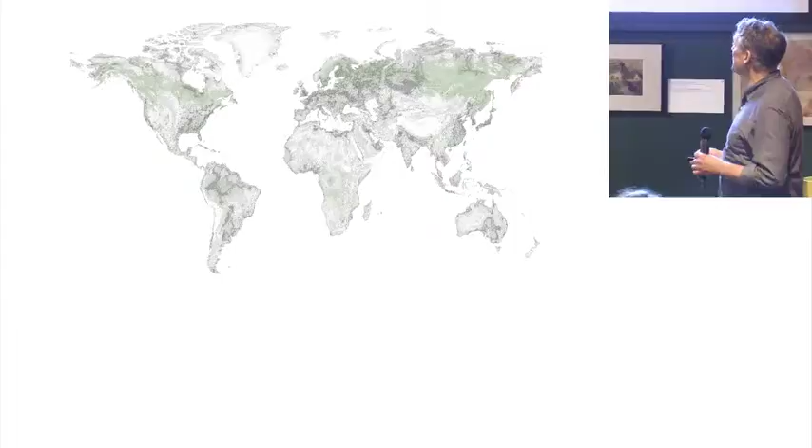This, again, is a carbon transect. Below it is carbon absorbed and stored; above it is carbon emitted. This is already out of date—it was drawn in 2017. We've surpassed 400 parts per million in the atmosphere, which is 50 parts per million above what is considered a sustainable density.

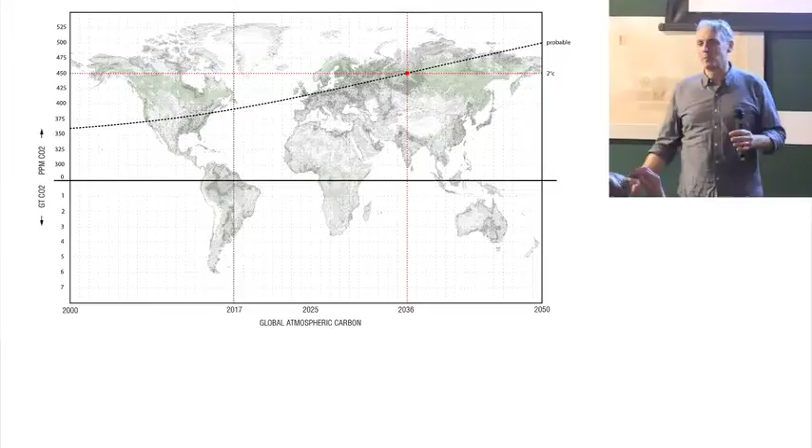That's the 2-degree temperature rise we came up with, which has now been revised by the SR15 IPCC report to 1.5 degrees, so that we can save some of the Pacific Island nations from being over-inundated with seawater.

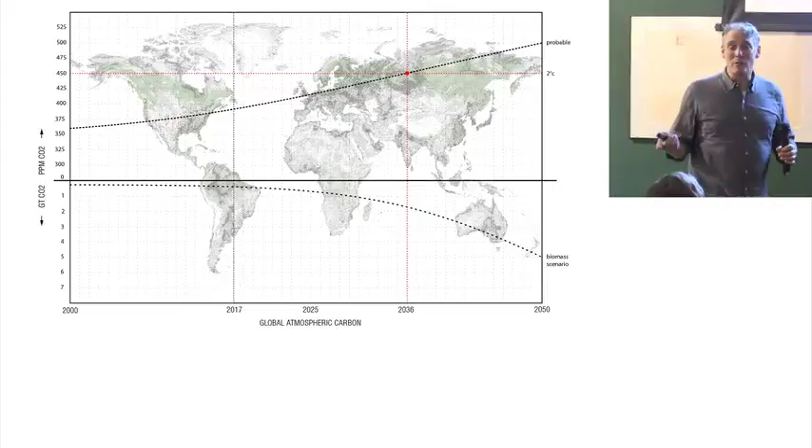Then we looked at how much carbon could be sequestered if we built all the new, just buildings, occupied buildings, not infrastructure. It was an estimate, of course, but we learned we could, within a range, store about 5 gigatons of carbon in the built environment, which, by the way, we're going to build anyway. So it's either going to get emitted or it's going to get stored.

Then we looked at what would happen if we used this biomass scenario—what would happen to the upward accelerating curvature of emissions. We found that we bent it down. Now, this, again, is an average, so you have to forgive the license I'm taking in talking about this.

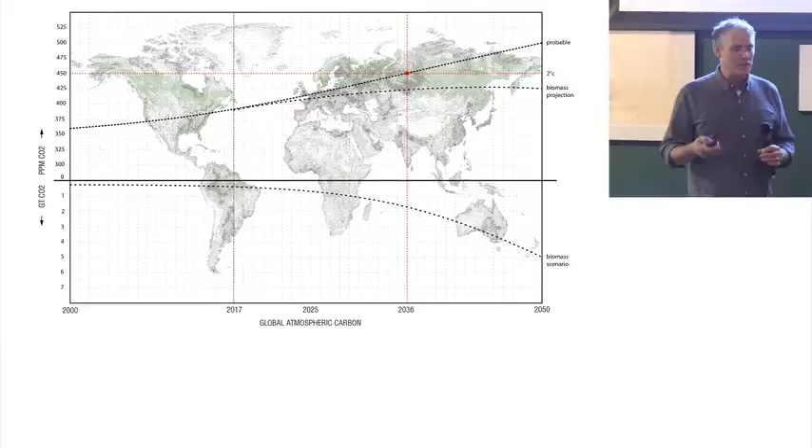The point is, we're going to build a lot of buildings, we're going to emit a lot of carbon, and we can store a lot of carbon if we can forest the world's forests, the right forests, sustainably. That temperate zone, and the boreal forest, is going to be an important provider, and we'll use the mechanisms of global economics and exchange to hopefully transition to post-agricultural waste products in the global south where there's less timber. We have a colleague in Indonesia right now who's making rattan glulam, which is a weed.

And so in a sense what we've done is we've rewritten the history, or we're rewriting a future history of global carbon. Starting with the Carboniferous era, where the fern-like trees and the sort of low number of aerobic bacteria that wouldn't digest cellulose basically consolidated into this vast fossil hydrocarbon pool in our lithosphere, to the point of the Industrial Revolution where we start digging out that fossil hydrocarbon and emitting it to build our buildings and fuel the manufacturing processes.

And then finally, through a new set of kinds of assemblies that maybe we can use, again, carefully, to produce a new biospheric building, which relies largely on renewable resources as well as industrial waste streams.

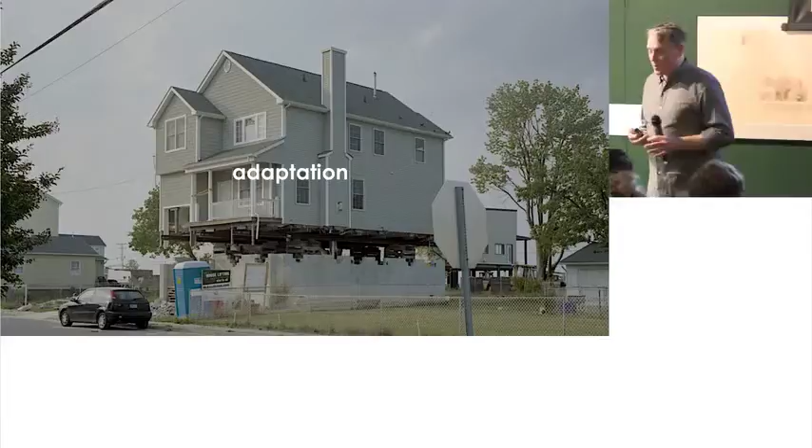So to this economic exchange, we know in the eastern seaboard of the United States -- I think it's less of an issue in Finland, but in the US, we have flooding all the time. And architects love to adapt to climate change. They talk about resiliency as a means of getting more work. We can build our way out of this problem, and yet we'll just exacerbate the problem in the process. I'd love to do the life cycle assessment on this concrete seawall. It will certainly last for a while, we hope.

And then the other option, which I think is less considered by architects and environmentalists, is that the built environment could mitigate climate change, which is what I'm talking about. And what does mitigation look like? It probably looks like a robust forestry, sustainable forestry system, incentivized forest restoration and afforestation, growth of new forests. And it has a lot of great, hopefully pleasing wood architecture in beautiful convivial densities like Helsinki. Thank you.

Millions of questions in my mind, but do you have any in the audience? We might have a few before Matti starts, or should we leave them at the end? Any burning questions? Anyway, one of your subtitles was something like mistaken by craft. I think Matti's title is much more forgiving, do no harm. I don't know what it means, but we'll hear about that.

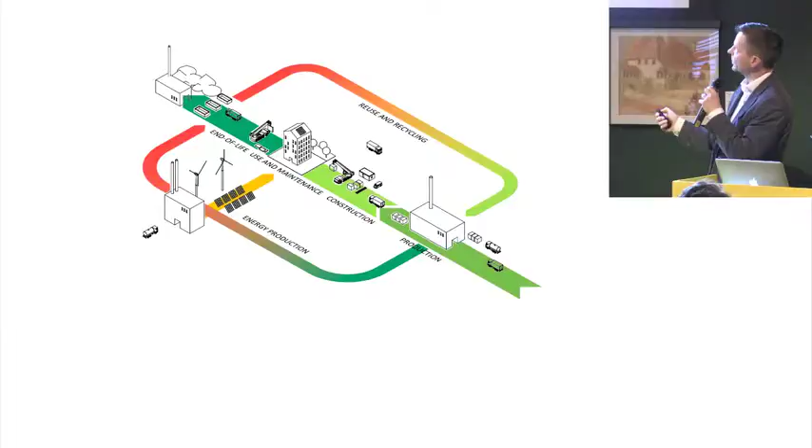So it's a question of architecture and a question of process. How can we make buildings work and maintain much of their function while creating far fewer environmental problems? One thing is for sure: we must get away from linear thinking, that buildings just consume energy and materials over their life cycle, and shift to circular thinking, especially in construction, where material flows put into the built environment are reused and recycled, either into new construction products or at least into energy that feeds back into and sustains the built environment.

To bring more perspective, I'd like to take you to a case study: Alan's and Lisa's wonderful school, a very nice building. I had the privilege of getting full access to the building information model and all the bills of materials for this building. Together with my colleague at Aalto University, we made a calculation exercise to figure out how large the carbon footprint of the building and its site is, and whether it would be possible to reduce that without touching the architecture and geometry of the building. We also wanted to see how large the carbon storages and sinks are around the building.

Now, unfortunately, we're going to the boring part of the presentation where I'll show graphs and figures, but let's hope you can tolerate that after having seen so much eye candy from Alan's previous presentation. So let the boredom begin.

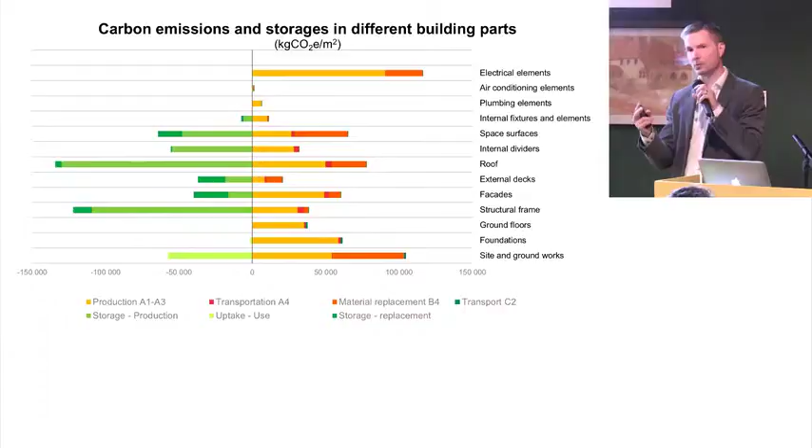But we should think about also the principle of do no harm in this instance. And then the second interesting thing is that the site and ground works seem to cause relatively much emissions, although there is also the potential for sequestering carbon on the site. Now let's take a bit more detailed look about these.

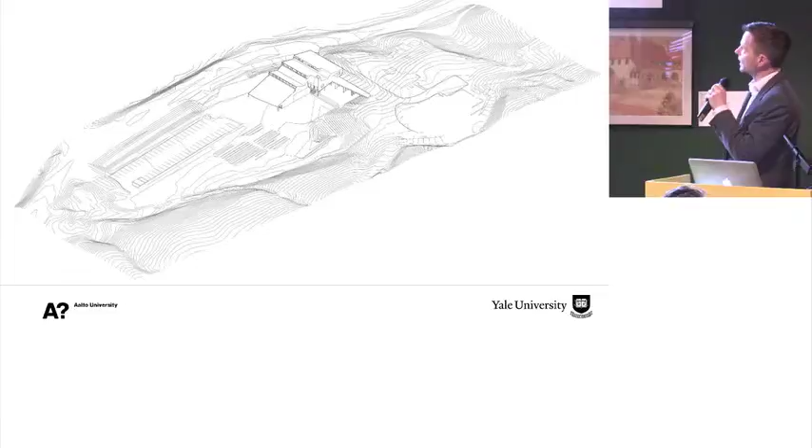So first, if we take a look at the site, as Alan described, there used to be a site without any buildings, some trees standing there, and then there was some soil removed, some new soil and gravel brought in, and some asphalt roads done, and some concrete paving done, and the building was built. And while this was done, there were lots of emissions, mostly from the making of asphalt for the roads, but also from concrete paving and plastic pipes and so forth.

And in the graphs on the following slides, I'm going to show you three things. First of all, the emissions, then how much carbon was either stored or sequestered, and what could have been done otherwise. What could we avoid if we chose a different approach?

So we can see that if we just look at the site, it's the asphalt road and concrete paving that cause most of the emissions. But luckily the soils of the site in this building, while the building is being operated for 50 years, there are herbaceous plants, grasses, trees growing, and all these natural processes or ecosystem services, they accumulate carbon from the atmosphere into the soils. And that's actually pretty much more than what the production of asphalt causes.

So lesson number one, we shouldn't underestimate the role of ecosystem services in our building projects, and this is something that is very poorly understood, especially in the urban context, unfortunately.

Then, second thing, foundations and ground floor slab. Here we can see that most of the emissions are caused from the concrete used for these building parts. There is very little carbon to be sequestered. But if we would have used a greener cement mix in which we could use cement substitutes such as fly ash or blast furnace slag up to 25 or even 50% of the amount of cement, we could cut the emissions from the use of concrete into half.

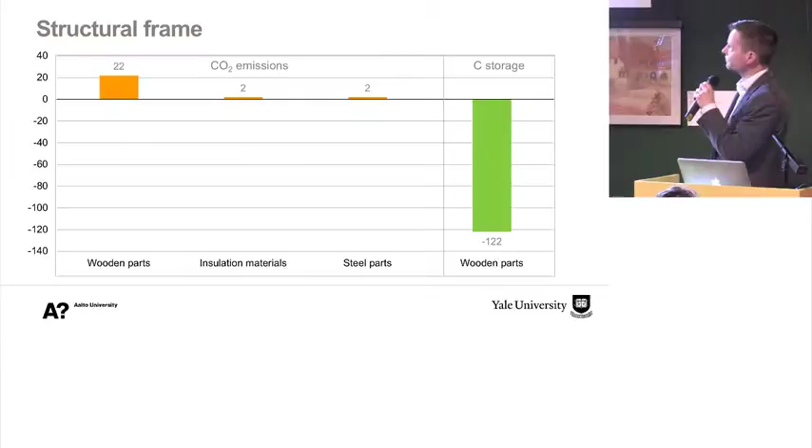But then again, you need to realize that in a typical construction project, you have other aspects than just the carbon footprint. There's fire safety, acoustics, and also the price. So gypsum board today is positioned so well in the cost optimum of construction materials that it's really hard to defeat in the construction markets.

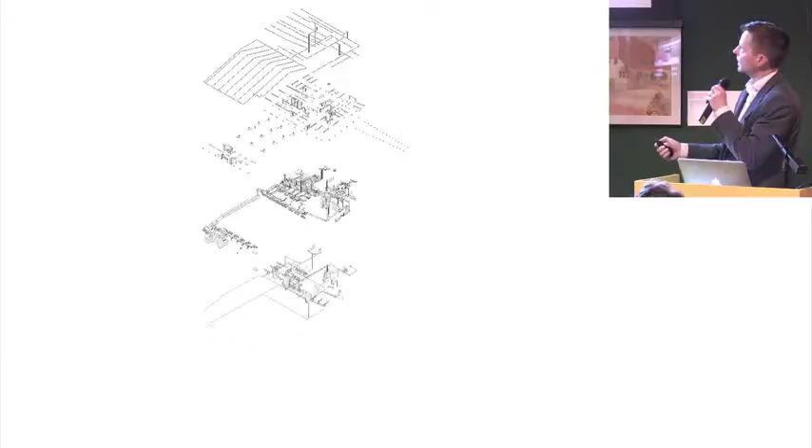Then finally, this building, even though it's a wooden building, has lots of building services, electric cords, ventilation, perhaps cables and ducts. And so does this beautiful Common Ground High School in New Haven. The interesting thing is when we calculate all these and sum it up, that shows a remarkable impact on the carbon footprint, especially the solar panels. The impact of making these is huge.

However, there's good news. There are so many ways of making solar panels. These are made from monocrystalline PVs, which is one way of making solar panels. It's the most common today, and has the best price-to-kilowatt-hour ratio. However, if they used thin film solar panels instead, we could cut this emission in half, while keeping roughly the same level of renewable energy harvested from the roof of the building. So I think architects, engineers and designers should pay attention to the options for harvesting renewable energy in a building, because that can really lead to making harm or making no harm.

But still, if we are using these solar PV panels, the monocrystalline panels, the emission savings with these are huge, nevertheless of the emissions caused in their production phase. Depending on what scenario we imagine for the electricity's carbon footprint in this area, using solar PVs in the building can save from 370 to almost 1,000 tons of CO2, because you didn't have to purchase electricity from the grid, which has a certain carbon footprint in this area. So even though they had a big carbon footprint, that was an investment worth making.

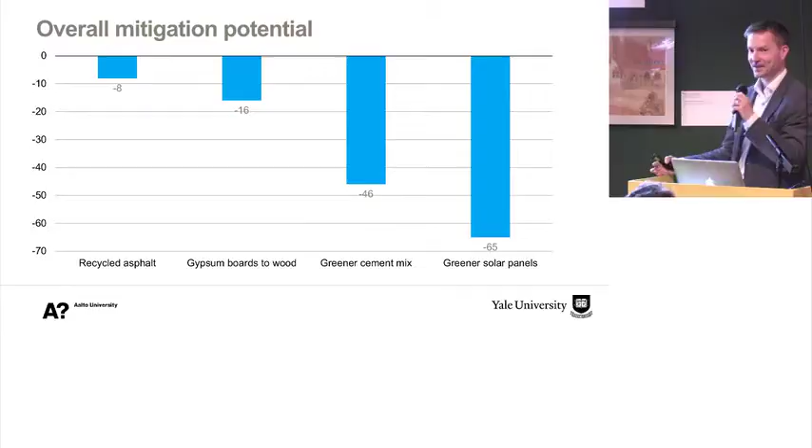Then if we sum up all the mitigation potential in this building, what could we have done otherwise? It seems greener solar panels are the greatest thing you could have done, and greener cement mix, obviously. Then if you switch gypsum boards into wood, that has an impact, not large, but an impact. And if you could use recycled asphalt on the site, that would also make some difference. But the big gains are here—these are the low-hanging fruits we should take into account in the next projects, and maybe you're also already taking these into account. Oh yeah, that's great to hear.

So this mitigation potential, all summed up, is some one-fifth of all the emissions caused when the building parts were manufactured. Now that sounds like a big number, but unfortunately when we scale that up to the life cycle emissions of the building, it's only 4% of these emissions. This leads us to ask the critical question: what if the building had to be designed with half of the carbon footprint? How could we reach that?

The good news, however, is that most of the emissions are a consequence of direct design choices. Those of us who work as designers or construction managers have great potential and a great opportunity to influence these emissions. So we truly can be the good guys in this battle towards climate change.

Now, to sum it up, where is the ratio between the quality and the harmful impacts? Are the harmful ones winning? We can say that, of course, there is lots of quality in the architecture and function. There's lots of environmental quality in the storage of carbon and uptake of that on the site. And there's lots of quality in the energy efficiency and use of renewable energy. However, we have life cycle emissions from construction, and emissions from the land use change. It used to be relatively close to a natural state, at least there were trees growing. So there is a change of the land use and land occupation.

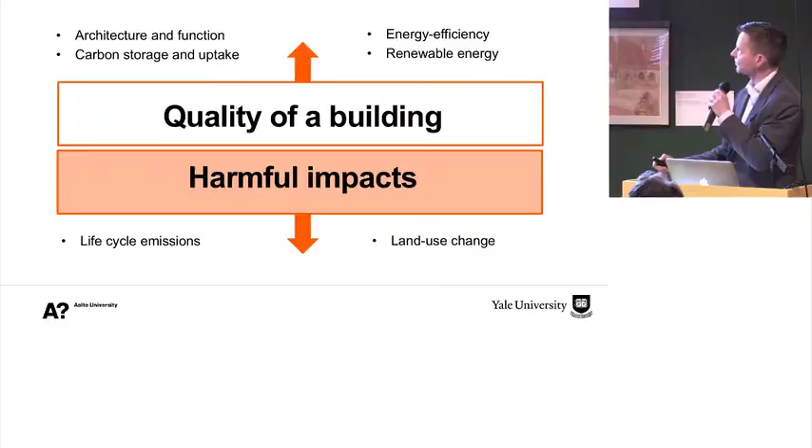Now let's get to this question. If we compare the emissions, the harms that the building is causing, to the good things, the sequestered and stored carbon, we can see that it's actually half of the embodied emissions. But still, even though this building, in my opinion, is a very high quality building with very good technology and wise design choices, it's still not doing that well. And this is not the fault of a designer. This is something for the whole construction sector to tackle.

Because it's impossible for an architect to make a building that's a saint if there are no raw materials, products, or processes for making that happen. It doesn't matter how beautiful the dreams are that you put on paper. It's the construction process and all the procurement decisions along it that either make it or break it.

But the interesting thing is, if this is like the state-of-the-art, excellent wooden school in the USA today in the 2020s, how could we make it happen in the 2030s if we would need to cut down the emissions by half, into something like this, or the 2040s, or 2050s?

Let's imagine that we could use just zero carbon footprint electricity for the building. We could have, let's say, wind power or something that would cut this off totally. So we would be left only with the embodied emissions. If that would happen, then we would be fit for the 2030s.